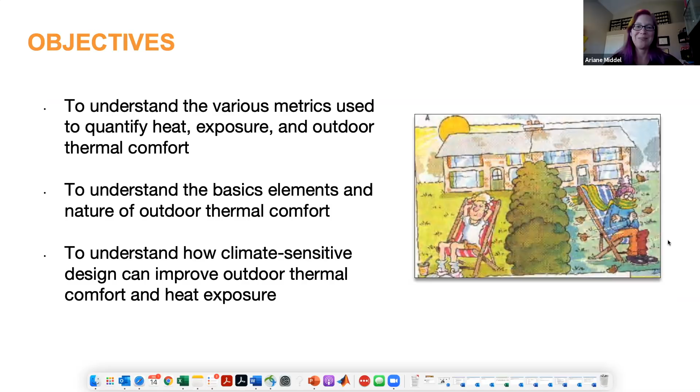First of all, what is heat? In physics, heat is the form of energy that's transferred between 2 things that have different temperatures, and the energy flow goes from the object with the higher temperature to the one with the lower temperature. When we talk about heat in an urban climate context, heat can be described and measured using 3 specific metrics: air temperature, surface temperature, and radiant or mean radiant temperature.

The most commonly used metric is air temperature, and it refers to how hot or cold the air is. When people talk about the weather, they usually mean air temperature. However, in some urban climate applications, the surface temperature can be relevant as well. Surface temperature is the temperature that you experience when you touch the surface.

And then finally, there's mean radiant temperature, or short MRT. MRT quantifies the heat load on the human body. It is the sum of different kinds of radiation that hits the human body from all directions. This includes the long wave radiation that is emitted from hot surfaces, such as an asphalt parking lot in the summer that radiates heat at the human body. MRT also takes into account the shortwave radiation from the sun in places where there is no shade.

MRT roughly equals air temperature in the shade, but in the sun, MRT can be 30 degrees higher than air temperature due to the added shortwave radiation, which makes a person feel much less comfortable when it's hot outside. MRT is the type of temperature that best describes how people experience heat when it is hot and dry outside.

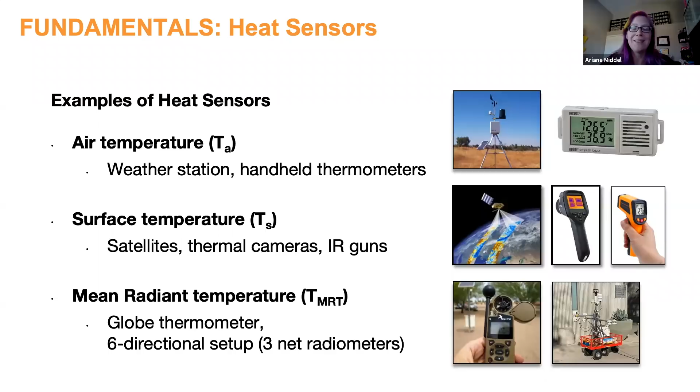With all the different types of heat metrics, the question that now comes up is, what temperature should we care about? And the answer is, we care about all 3. It really depends on the application and heat mitigation goal. For example, if you're interested in building energy use or quantifying the temperature difference between urban and rural areas, the air temperature is the right variable to use.

If you would like to investigate intra-urban heat variability in the surface urban heat island that pertains to the skin temperature of urban surfaces, the surface temperature is your first metric of choice. It is also relevant for applications that investigate the touch scale. For example, if you would like to know how hot sun-exposed playground equipment gets in the summer.

Finally, when it comes to thermal comfort and heat exposure of people, mean radiant temperature plays an important role. In dry, sunny areas such as Phoenix, it is the main driver of comfort, but there are many other variables in play when it comes to answering the question how people actually experience heat. Which leads us to the first interactive question of the day. What other factors besides air temperature and mean radiant temperature do you think impact thermal comfort?

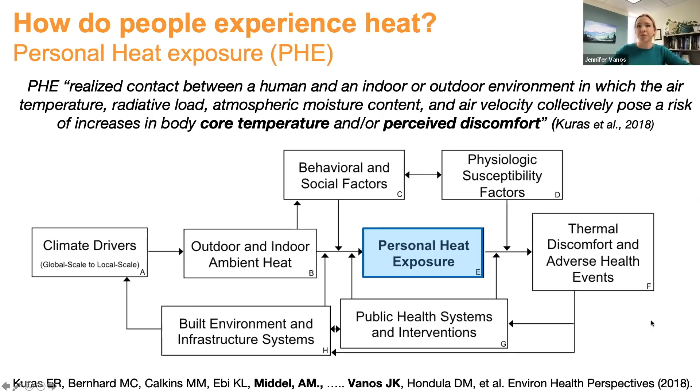So to fully understand comfort and discomfort, we need to go back to the fundamentals of what is thermal comfort. Simply defined, thermal comfort is the condition of the mind that expresses satisfaction with the thermal environment. There are 4 physical factors that we already talked about on the previous slide, as well as behavioral factors of clothing and activity. Finally, probably the most difficult and variable aspects of thermal comfort include psychological factors, such as expectation, experience, and perception, among others, as well as personal characteristics such as sex, acclimatization, and age. Adaptive models have been developed to account for these psychological and personal factors.

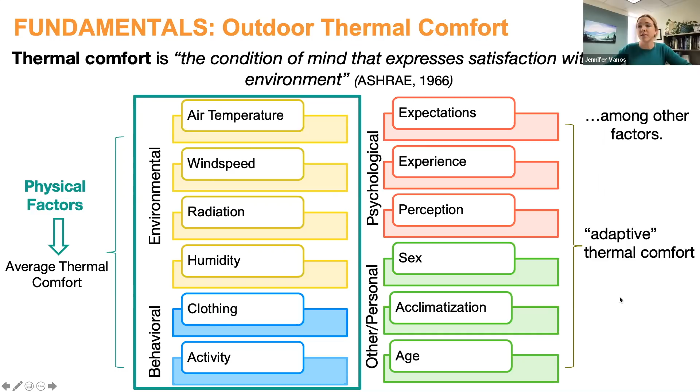So when considering thermal comfort, there are 3 main conditions defined by Fanger in 1970. The first is that the body is in heat balance. Second, that sweat rate is within thermal comfort limits. Third, that our mean skin temperature is within comfort limits. There's also a fourth, which is the absence of local discomfort. For example, you may feel general comfort in your body overall, yet your feet or hands may be very cold, making you report feelings of discomfort. Overall, Fanger's objective was to produce a comfort equation requiring input of only the 6 basic parameters to calculate thermal comfort and to assess the 3 main conditions stated here.

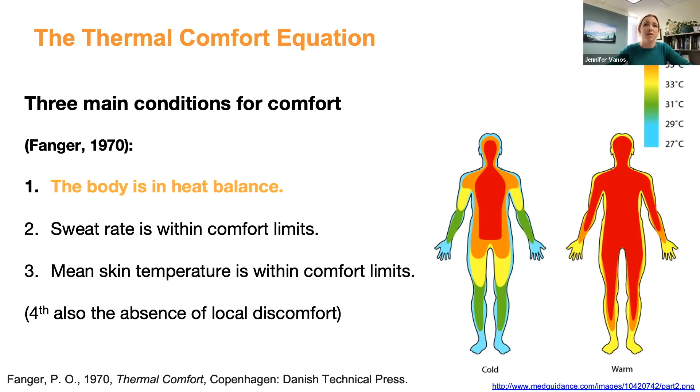So how can we model outdoor heat exchange to assess thermal comfort? Well, by using those 6 basic parameters, we can approximate energy fluxes to and from the human body, such as evaporative heat loss and convective heat exchange, to determine how close to balance or to zero the body is, just like our bank balance. So we can ask, is there an energy surplus or an energy deficit when we sum up these factors? And from these rational models, we can also estimate skin temperature, sweat rate, and other outputs.

In different climate types, such as a humid versus dry climate, the fluxes making up this energy budget may differ. For example, in a very dry climate, the evaporative heat loss is very high, yet convective heat loss can become a heat gain if the air becomes warmer than the skin temperature. Yet in humid climates, evaporative heat loss is much lower, limiting our ability to cool off. In all situations, by adding clothing, we increase the resistance of heat transfer from the body to the air, thus limiting cooling and making us feel warmer, which we must account for in these thermal comfort models.

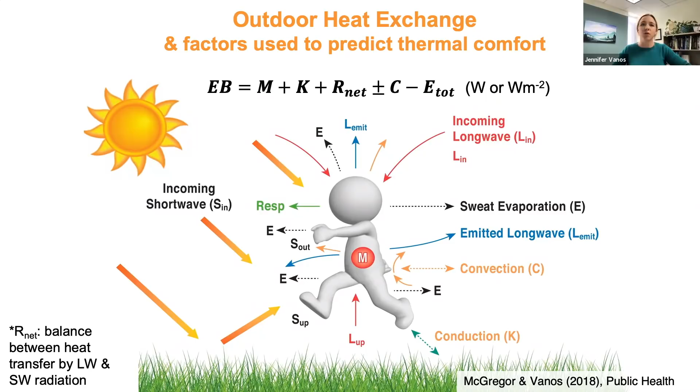However, heat balance is a necessary but not sufficient condition for thermal comfort. We can also be uncomfortable due to sweating or high skin temperatures, which are both highly dependent on activity level. Early work shows that skin wetness, which is a ratio between required and maximum evaporation, is a good predictor of comfort. This value will increase when not all of the sweat can evaporate from our skin, making us feel more

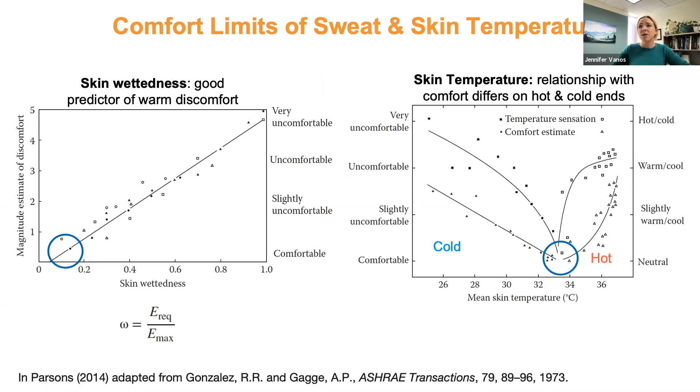and more uncomfortable. Skin temperature is also a good predictor of comfort, yet looks different in the cold versus the heat. When we get to the warm side, the evaporation of sweat helps keep the skin cooler, thus making the increase in thermal sensation appear very steep.

Thermal comfort and thermal sensation can be measured through surveys. In steady state, thermal comfort can simply be regarded as a lack of discomfort. And when one deviates from comfort in transient conditions, based on changing thermal load or activity, we will then want to measure a person's thermal sensation from hot to cold. An optimal environment would have an average rating of 0 or neutral.

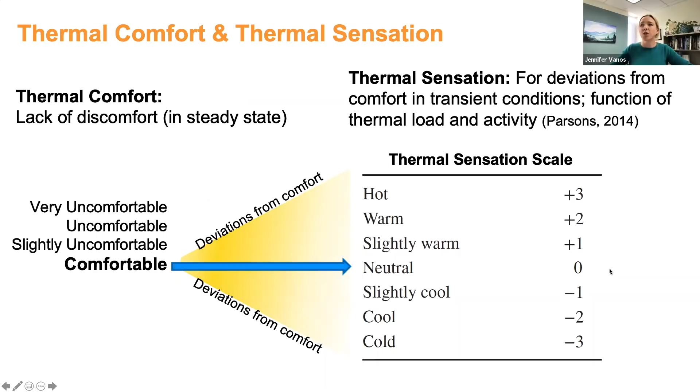Studies that use these subjective scales can ask participants to rate their comfort and sensation, and then researchers often will relate those responses to more objective thermal comfort models, as we're looking at here. So this is just an example of what we might be able to compare. When we look at subjective data, these are often referred to as a thermal sensation vote, TSV, or an actual thermal sensation, an ATS, or perception in research studies.

And then we want to compare those subjective outputs to more objective outputs using models. So some examples of models are the PET, the UTCI, the PMV comfort model, among others. For example, using this 9-point scale, the PET would expect someone to be neutral when the physiological equivalent temperature is between 18 and 23 degrees Celsius. That's not air temperature, that's the PET. Many other models can be used, but they may use different scales or units based on how they were developed and why they were developed.

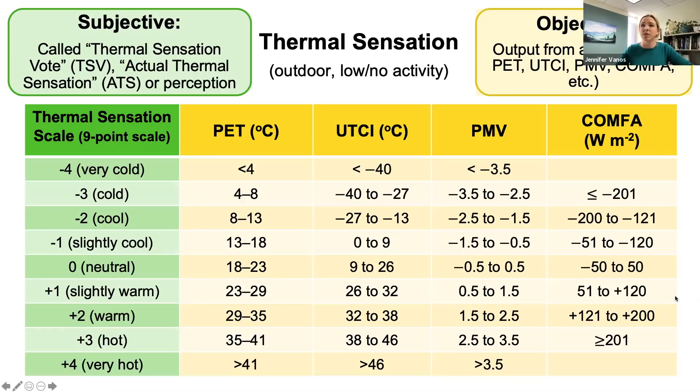In general, one hopes for a strong relationship if they're doing a study between predicted and actual thermal sensation. One example study led by Ariane and her team was completed in Phoenix, Arizona, using the PET, where they found a strong relationship between the mean actual thermal sensation vote and the modeled PET across all seasons. The neutral PET across these seasons, in this case, was 28.6 degrees Celsius.

This neutral PET may differ from location to location due to acclimatization, expectations, experience, population type, age, among other factors. This study also quantified the impact of shade on thermal comfort, a very important aspect of urban design for thermal comfort in the heat.

In the second half of this presentation, let's now look at some specific case studies that investigate further how to understand and manage heat. There are broadly 3 different approaches to heat mitigation. The first approach involves green infrastructure. Vegetation cools the environment through evapotranspiration, and trees provide shade, which reduces the radiant heat load on the human body and the surface temperatures underneath the tree canopy.

The second heat mitigation approach changes the thermal properties of materials that can be found in cities. For example, changing the color of roofs and pavement to a lighter, more reflective color will reduce the amount of heat that is stored in the urban fabric because the energy from the sun is reflected back into the atmosphere.

And then finally, the third heat mitigation strategy that is probably the most difficult to implement is changing the urban form. The way we design buildings and how we arrange them impacts airflow, temperatures, the amount of shade that's available, and so on. Changes in urban form can usually only be achieved over time because it requires redevelopment, so this heat mitigation strategy involves a little bit of planning.

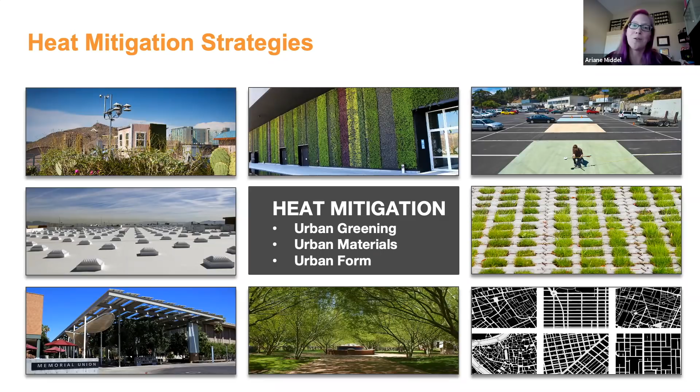The first case study I would like to present addresses shade availability in cities. Municipalities around the world have recognized the importance of shade to reduce heat stress, and they adopted urban forestry plans with ambitious canopy goals. Oftentimes, though, the implementation of those plans is difficult because of maintenance issues, water use concerns, and infrastructure challenges. Engineered systems such as underground water utilities, communication cables, and overhead power lines stand in direct competition for limited space in the city's right-of-way. This case study was conducted in collaboration with the city of Tempe in Arizona.

We used the MaRTy cart to measure the performance of various shade types, from lightweight structures such as umbrellas, shade sails, and pergolas, to shade from urban forms such as awnings and overhangs, and then shade from buildings, and then finally shade from various tree species. We compared all of those shaded locations to sun-exposed sites that were not shaded at all.

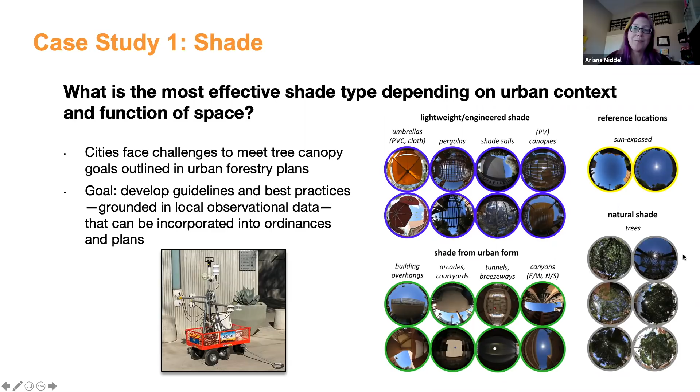We measured all of these shade types during 3 times of day, which is at solar noon when the sun is highest in the sky, in the afternoon when air temperature is close to its peak, and then right after sunset. None of the shade types affected air temperature significantly, but mean radiant temperature varied as much as 50 degrees Celsius between measurements. Comparing the 3 shade categories, lightweight structures, natural shade, and shade from urban form, it is evident that all shade is great and significantly reduces MRT during the day, but urban form is most effective in providing shade, followed by trees and engineered structures.

So based on these observations, we then developed characteristic shade performance curves that illustrate how mean radiant temperature changes over the course of the day for each shade type. And this will inform the City of Tempe's design guidelines towards using the right shade in the right place and will help with active shade management in the city.

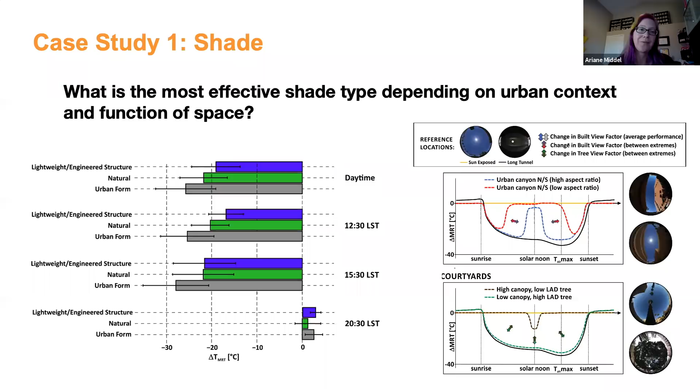Now I will talk about a case study in which we looked at the impact of misters for evaporative cooling in a hot, dry climate, which again was in Phoenix or Tempe, Arizona. So the goal of this case study was first to quantify the influence of evaporative misters on the thermal environment in outdoor restaurants in both the sun and shade, and second, to understand business managers' motivations to use misters.

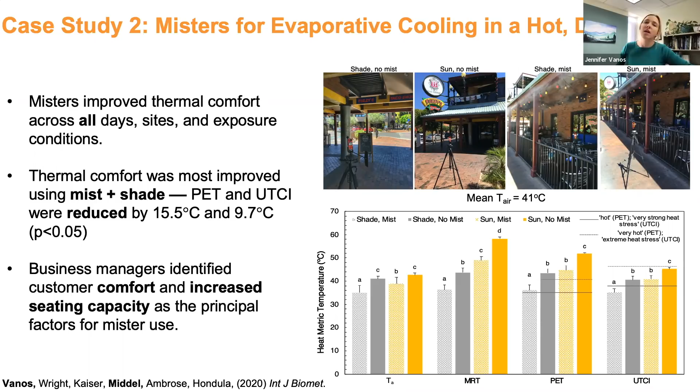Results showed that misters improve thermal comfort across all days, all sites, and all exposure conditions, and was most improved using mist plus shade, where the PET and the UTCI were significantly reduced by 15.5 degrees Celsius and 9.7 degrees Celsius, respectively. Business managers also identified customer comfort and increased seating capacity as the principal factors for mister use. While this case study demonstrates value in outdoor misting in hot and dry climates, additional work is needed to more fully evaluate trade-offs between cost, water use, and comfort with continued urban growth.

A third case study we wanted to share is where we modeled spectators' thermal comfort at the original Tokyo 2020 marathon course, which has since been moved to Sapporo due to concerns of heat. However, in this study, we used sky view factors modeled along the streets by Ariane Middel, plus a full suite of mobile weather data. And we were able to complete heat balance modeling of the spectators to identify where they would be the most uncomfortable along the race course at the specific time of day during which the races would be run. With this data, we were also able to make recommendations to improve the microscale conditions for the spectators and, of course, the runners.

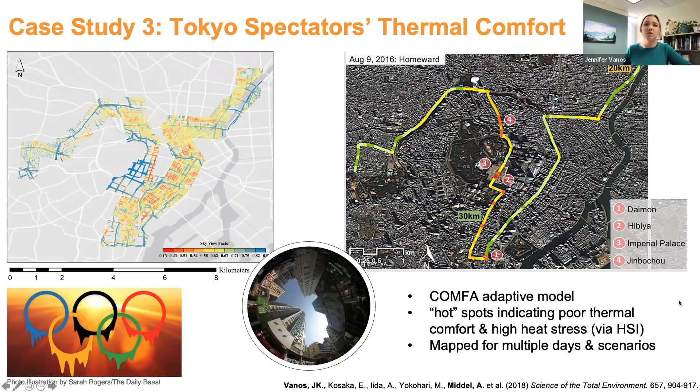The fourth case study highlights a fairly new heat mitigation strategy, cool pavement. The idea is to increase the albedo or reflectivity of asphalt roads by coating them with a lighter color to reflect the sun's energy back into the atmosphere instead of storing it in the dark asphalt. By reducing the surface temperature, the hope is that the air above the asphalt will not heat up as much, which then reduces the urban heat island at night. For this case study, we actually need to investigate all 3 heat metrics for comprehensive analysis. So this is an ongoing project with the city of Phoenix.

Last year, the city coated asphalt roads in 8 neighborhoods with Cool Seal, a highly reflective coating. And to assess the impact on the thermal environment, we conducted vehicle traverses last summer to measure the air temperature distribution in those neighborhoods. And we also placed iButtons inside the asphalt to measure the in-ground temperature, which is important for asphalt degradation. We also did helicopter overflights to take thermal images of the surface temperature distribution in the neighborhoods. And we took MaRTy out for a stroll to measure mean radiant temperature on the road and adjacent sidewalks. Over the course of a year, we will take spectrometer readings every month to monitor the reflectivity of the pavement.

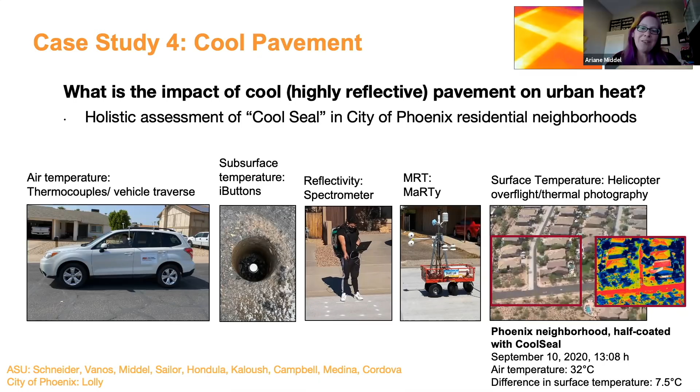We are currently in the process of developing surveys that will be sent out to residents to ask what they think about the new look of their streets. The study is still ongoing, so we won't be able to share results with you yet, but this is to demonstrate that all of the heat metrics are important for a holistic analysis of heat mitigation strategies.

Now, to end the case study section, we would like to ask another question, and we would like to know, what do you think, what % of downtown city land on average is used for vehicles in the United States? That includes parking lots, roads, and any other paved surfaces.

So with any heat mitigation strategies, there are always competing goals and trade-offs that need to be considered. So there's no silver bullet and no one size fits all heat mitigation strategy, unfortunately. If you increase the amount of vegetation, which provides cooling through shade and evapotranspiration, you also increase the amount of water that needs to be used for irrigation, especially if you're in desert environments such as Phoenix.

If you increase shade during the day to increase thermal comfort, you may actually end up trapping the long wave radiation in the evening, and there will be some heat retention at night. So these are things to consider when you provide shade.

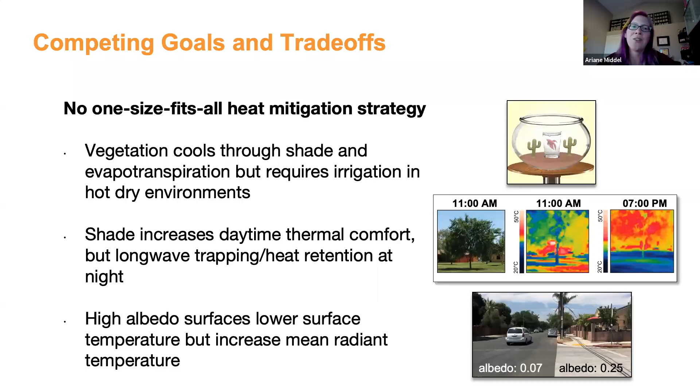And then finally, if you decide to increase the reflectivity of your surfaces on the pavement, on your roads, that will be really great to reduce the surface temperature, but then it may also at the same time increase the mean radiant temperature. So there's really no one size fits all solution, and it always depends on the context and your heat mitigation goals.

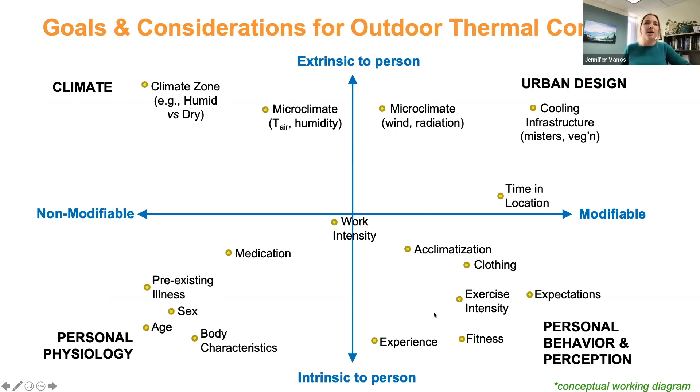However, we cannot modify pre-existing illness, their sex, their age, certain body characteristics, or if they're taking medication, which will also affect their thermal comfort. So it's very valuable to think about these in ways and trade-offs. And of course, the location of these will differ depending on the study and the person you're working with and the city you're working within.

So with that, we'd like to wrap up and conclude and just summarize some of the main points made here. So the urban infrastructure can increase heat exposure, as was also discussed in part 1 on urban heat islands. And it can also mitigate heat through vegetation, urban form, and materials that Ariane outlined. Sensors and models can help quantify those impacts. And the type of metric is an important consideration. Individual thermal comfort is complex and highly individualized. It's important to understand the model used for thermal comfort as well.

Finally, there's no one size fits all for designing thermally comfortable spaces. And that's not just for the way we design it in a city with form and function, but also thinking about what people will be using that space. So those spaces should be responsive to the needs of their users and be climate specific.